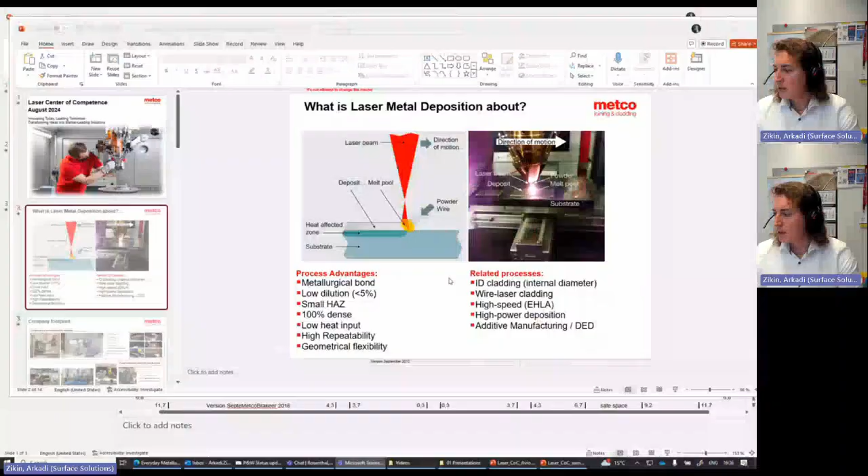So what is happening in laser? If we use laser as an energy source, we focus it with the help of certain optical components, because laser is just a box. You have some fibers which bring the laser beam to a surface. You can define dimensions - typically it's a circular spot, and you can define the diameter of it or the shape of it. That means I know exactly that within a certain shape, which I put with my mirrors, I have an energy input.

You can go further with monitoring and temperature measurement. I can even measure temperature within this spot. Then I can introduce a filler material in terms of powder or wire to this area, and then I build a melting bath which interacts with my substrate material in a very minimum way. So it means we extremely reduce heat affected zones, we have less impact on substrate, and we also minimize distortion by still maintaining a metallurgical bonding.

So the biggest advantage of welding is metallurgical bonding. However, if we compare laser to classical MIG, MAG, and even PTA processes, the core advantage is dilution. I don't know, Peter, if you know what dilution is. Yeah, it's the mix between the substrate and the powder you add. So typically in welding, you have like 50%. It's typically a 50-50 mix.

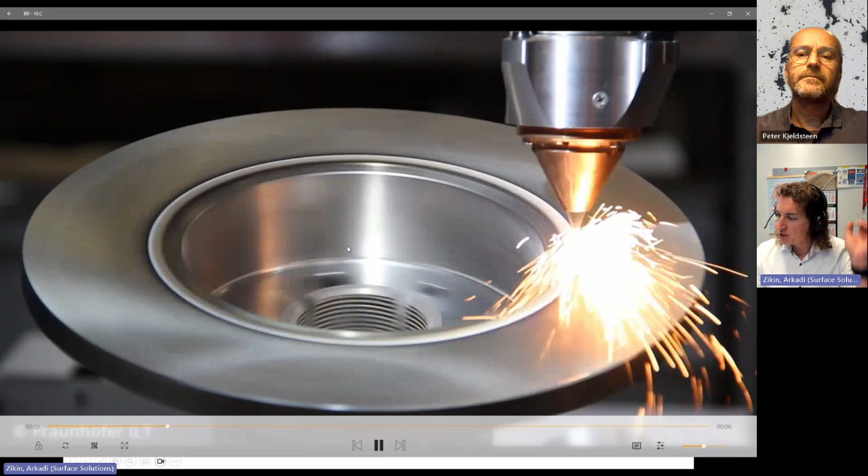I just want to show you a very beautiful video of how you can see the process working. Let me pause here.

Important to show you: this is a nozzle which feeds powder to the surface from one side. What you see here is nothing else than a powder flow to the surface. The laser beam comes in the middle from a nozzle to the surface as well. This orange area here is the laser beam, because it's not visible to eyes in a normal environment, since we work with infrared lasers.

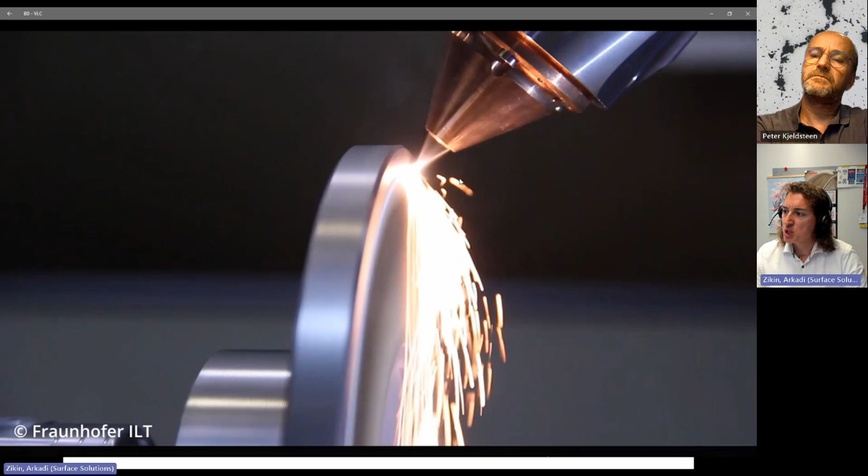So the powder is forced, it's not a free fall. It's injected with a gas, a carrier gas. Typically we use feeders which transport the powder to the surface using argon as a carrier gas.

But in differentiation, I know you have an HVOF background. In HVOF, you accelerate particles to maximum speed toward the surface because you want high kinetic energy. In our case, it's the opposite. We want as little powder kinetic energy as possible, because we don't want the particles to jump away from the melting bath, we want them to stay. This is a second advantage of laser cladding.

If we talk about deposition efficiency, in simple words, how much percentage of the powder I put on the surface remains within my coating, we talk nowadays about 90 to 95%. That's pretty high. In HVOF, if we're above 50%, it's a good day. There are some plasma processes where it's below 30%, and for laser too you can have lower deposition efficiency. It always depends on your task, but for normal applications, this is the case.

It's also very important to see that the heat input is extremely local. If you did this with PTA or any other process, the whole part would already be red. So your heat input is extremely high compared to laser cladding, where it's very local. There's not much powder going to waste.

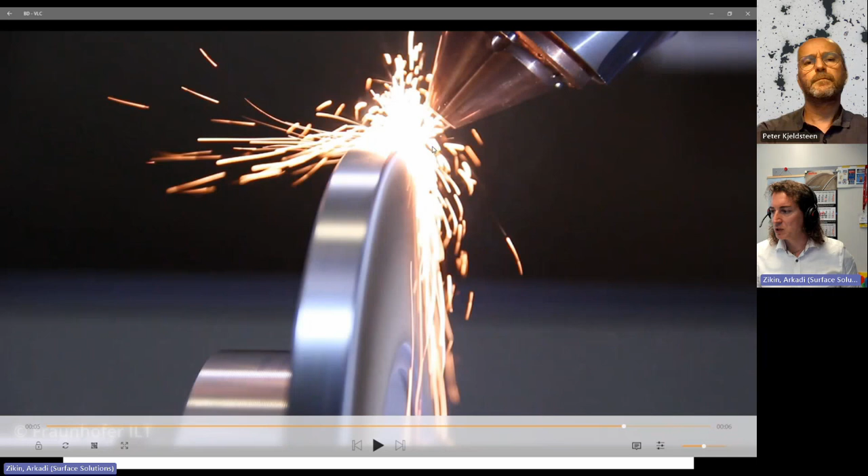So there are a lot of technological advantages which help us talk about it as a king of all deposition hard-facing processes, while still having a background as a welding process.

If we go further, advances in laser development have brought us to understand that the laser beam can be transferred to any type of geometry. So we can work on internal diameters, meaning there are tools which enable us to go inside pipes with a minimum diameter of 25 millimeters. We talk about a €1 coin, where I can go inside and cover the area.

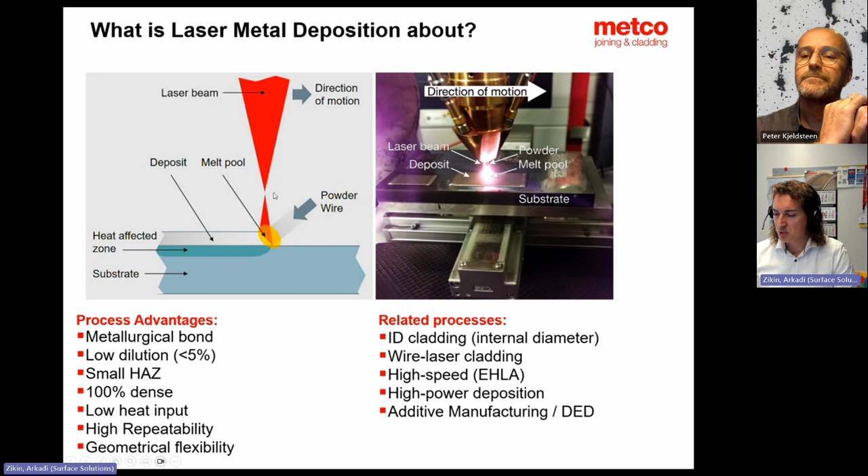We also talk about so-called additive manufacturing, which in laser cladding terms we call LMD, laser metal deposition, or DED, directed energy deposition. It's nothing else than doing multiple layer depositions to build complex structures and shapes. They can be free-form, or have special features on top, and so on.

Let me give you an idea of what we do at my company, Oerlikon, where we work under the brand Metco Joining and Cladding. We use lasers as an energy source for a bunch of different applications. We're not really dependent on one product or product group. If there's a need in oil and gas, power generation, or automotive industry, we even build rocket components using this technology.

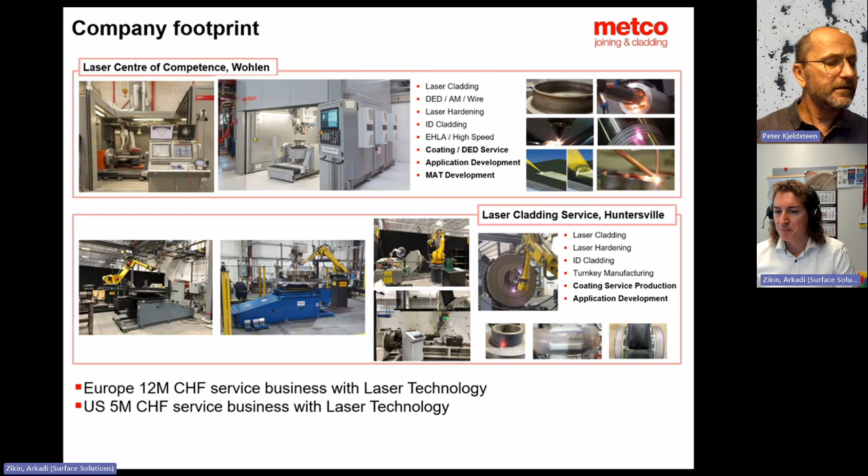I believe the rocket exhaust from the Ariane 5 rocket is made with DED. I can't tell the details on this because this is a property of ESA, Ariane, and other suppliers. But what we can talk honestly about, and this is something I'm personally extremely proud of as a technology-passionate guy...

SpaceX has introduced the third generation of engines, Raptor 3, and they say it has over 80% additive manufactured components. If we talk about over 80% manufactured components with additive manufacturing, you can be sure there are also DED or laser cladding components included. Absolutely, yeah.

We do our work. Unfortunately, I can't share any results, but we've been doing this for 5 years already, not as research, but I'd say together with a customer, process qualification. To my knowledge, we are one of the advanced manufacturing centers exactly for this type of complex question.

Arkadi, you said that you're able to control or measure the temperature on the deposition quite accurately.

I've been working a lot with high temperature processing, and I've learned that one of the most difficult things in the world, even more difficult than to understand your wife, is to measure temperature when radiation is dominating.

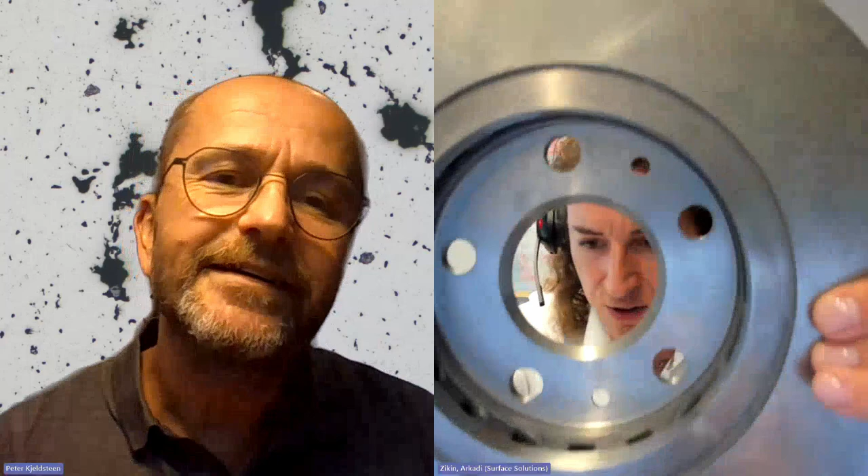So this brake disc—if I look at my brake disc in the car, it wears and it gets smaller and smaller. But the technology you were talking about, you said 15 microns? Let me step out from the camera and come back with an example. So I have one brake disc here with me. It's on my desk always, with a laser cladding coating after post-grinding, post-machining.

What is the motivation to put an additional process on a brake disc? It's all driven by the new Euro 7 norm, which declares that fine dust emissions should be reduced. It's not a commonly known fact that 30% or above 30% of fine dust coming from a vehicle is coming from the combination of brake disc and brake pad.

Probably, Peter, you also noticed two things which happen to a disc. First of all, if you drive a lot, especially on the highway, and you have to brake a lot, suddenly you realize that your colored discs are all black—because the dust just covers it. When I was young, I was always thinking, damn, are those streets so dirty that my disc gets so dark colored? No, it's because of the wear of cast iron on the surface of your disc and the wear of the pad. This all causes fine dust particles which harm our health.

And you know what? I would never live close to a railway station, because if a train is braking, can you imagine how much fine dust is coming out from there? People don't talk about this much. That's even worse, because the disc is like 500 to 600 millimeters in diameter. Of course they have different braking systems, but classical trains also do use brake disc and brake pad combinations.

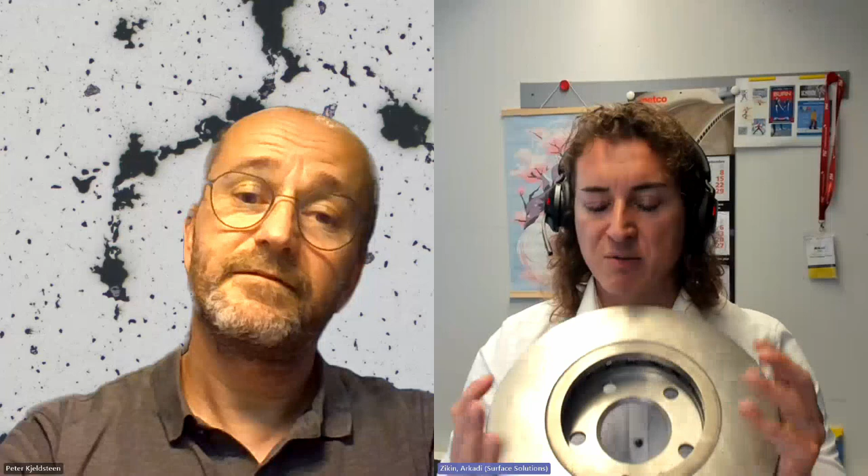So thermospray technology had a couple of great solutions. However, when they realized how expensive it would be per disc, they said there must be something cheaper. That's how laser cladding came into the game, where the people who work in the laser world found a solution that says with high-speed cladding, we can cover the surface within 20 seconds. That means our processing costs are not so high. We can deposit with 95% material deposition rate, so our material consumption rate is also pretty high, and the post-machining demand is only 50 microns.

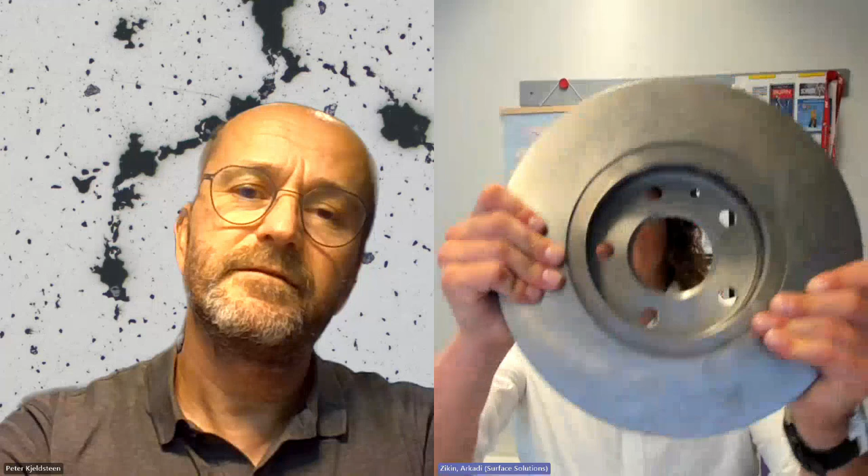So within a full minute, just to give you a feeling without going into technical details, you get a full brake disc ready. Basically automotive companies pay only for a minute of processing. Of course there are investments and so on, the processes are running, but you need to fulfill the Euro 7 norm.

Does it improve your wear resistance? Definitely does. Do we use carbide coatings like we used for Porsche? No, we don't. However, the materials which are qualified there have all survived salt spray tests over 1,000 hours. That means we're talking about something highly corrosion protective. So this dust, or rather corrosion, especially for e-vehicles, is not an issue.

And I'm quite excited about when this will really be in serial production, because I would definitely change my car's brake disc to one of the deposited discs using Oerlikon materials and Oerlikon technologies. This is what, when we come back to passion, makes us extremely proud that we are part of something which is changing the world in a better direction. Can you disclose what metal you put on top of it?

Currently, there are several combinations. We have developed our own materials, so we invest a lot of energy and time to develop materials for technologies, for applications, having special properties exactly to be used in this so-called high-speed cladding process, and at the same time still meet quite harsh requirements in terms of price.

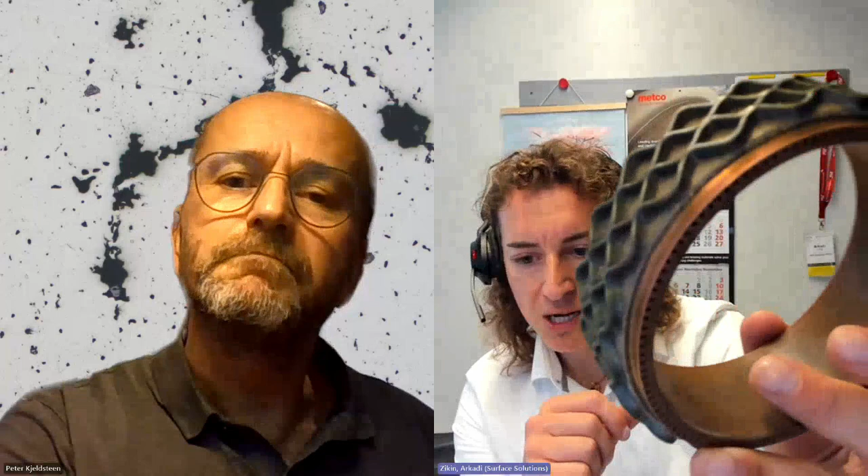So can we build internal holes? To a certain extent, because in this case it would mean we need to work overhang. Under a certain degree or angle, we can do this, to produce repeatable structures like honeycombs. This is a special case of an additive manufactured copper part without distortion, we can also do this.

So there's a lot of knowledge behind how I design my process, and by process I also mean fixturing. Because if you need to build 3D parts or complex shapes, it's not only about starting a laser, putting filler material, and building something. It's also about understanding the whole process chain, how I control the process, what about the fixturing, how I set my strategy, which surfaces I do first, how I cool down the component if required.

This is what probably I'm quite proud of, in that the team which I have the privilege to lead or supervise has gained a fundamental understanding of how those various technologies within the laser cladding portfolio we have impact your process, and how understanding them, fixturing and so on, diversifies your offering to a customer.

You said previously you had this aha experience with the accident with the wrong mix, where you had a cermet, a mix of ceramic and metal. So are you able to deposit every kind of material? Could you deposit pure ceramic, or are you limited there?

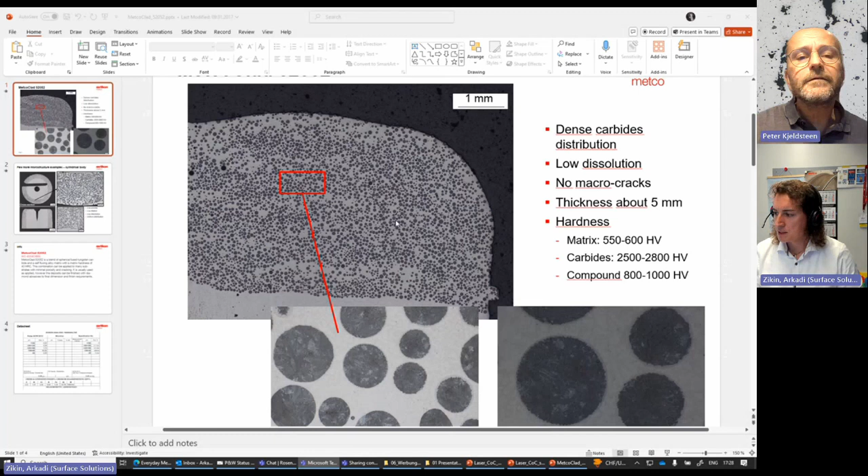Now you see here a classical material, we changed the name, Metcoclad. This is multiple layer deposition of tungsten carbide spherical particles in a nickel self-fluxing base matrix. If you look closer - and this is the most important image - this is so-called fused tungsten carbide. It consists of two phases, white and dark, which have different amounts of carbon inside. It's called double tungsten carbide - I don't know how it is in English, but fused tungsten carbide is the proper name.

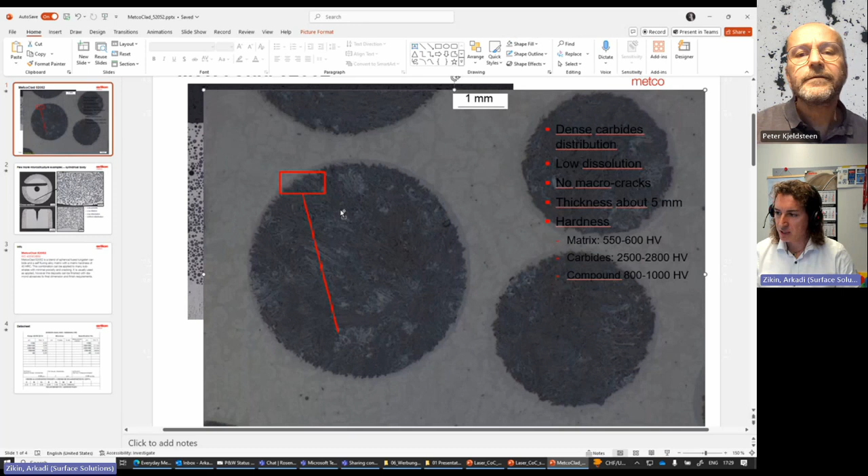What happens typically within: you have a dendritic nickel self-fluxing matrix, you can see it here. In any conventional process, typically you melt those carbides down so much that they actually recrystallize and build eta phases inside the microstructure. Here you see a very beautiful, maintained rounded-shape particle which was an initial particle, and there is almost no diffusion zone of the tungsten carbide, which helps keep the carbide hardness. I'll put it in white color now so you can see it - almost up to 3000 Vickers, an impressive number. And if we look deeper, they are extremely well and uniformly distributed within your coating profile, and this is only 60 weight percent, which corresponds to 40 volume percent of tungsten carbide within the metallic matrix.

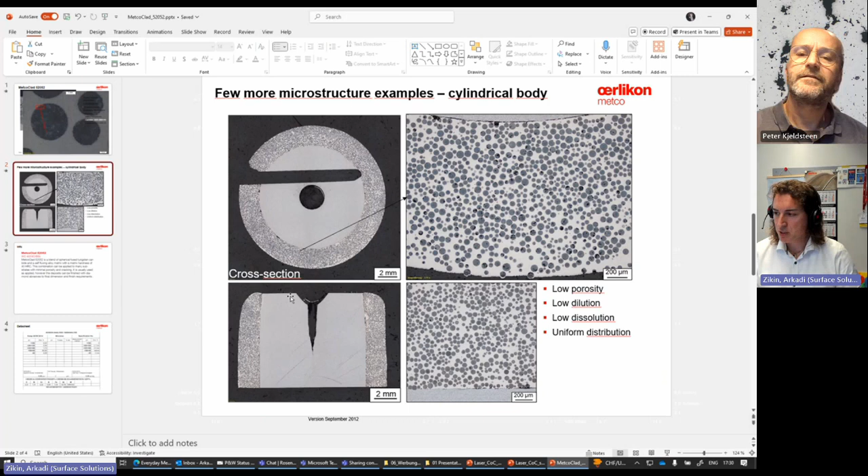It is not possible to see on the microstructure that it is deposited. It has a typical casting microstructure. I can probably give you an example more on a stellite, let's say - I don't know why my PowerPoint is not working properly today, but here.

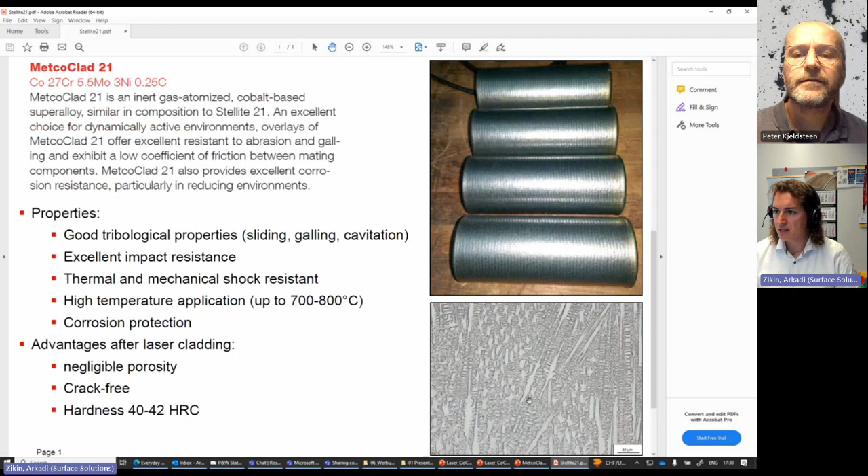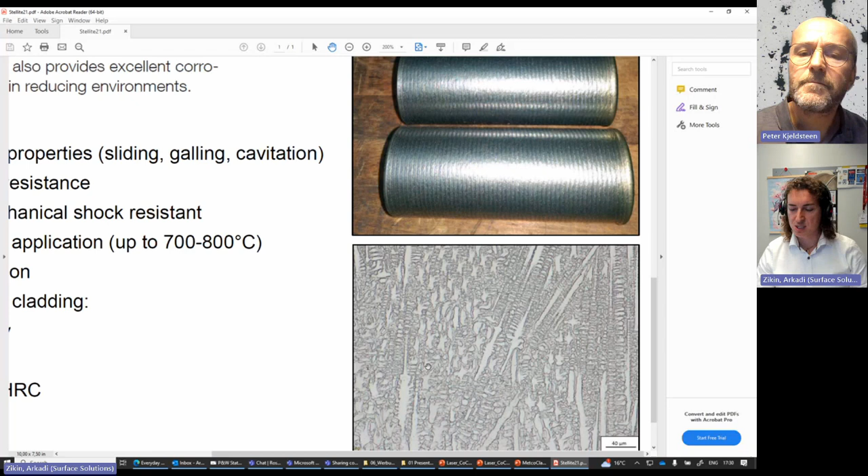If you look at stellite, like 21, it has a typical hypoeutectic structure, dendrites everywhere, so you get it in a similar way to casting. The difference with laser cladding is that due to low heat input and extremely rapid cooling, your microstructure is 10 to 100 times finer compared to casting. Here you see 40 microns, and the dendrites are pretty small, which gives many dendritic alloys like stellites higher hardness values directly after deposition, so you get better properties overall. The Hall-Petch effect shows that finer particles or finer grains give you higher hardness. And you also get better corrosion resistance because you have much more grain boundaries.

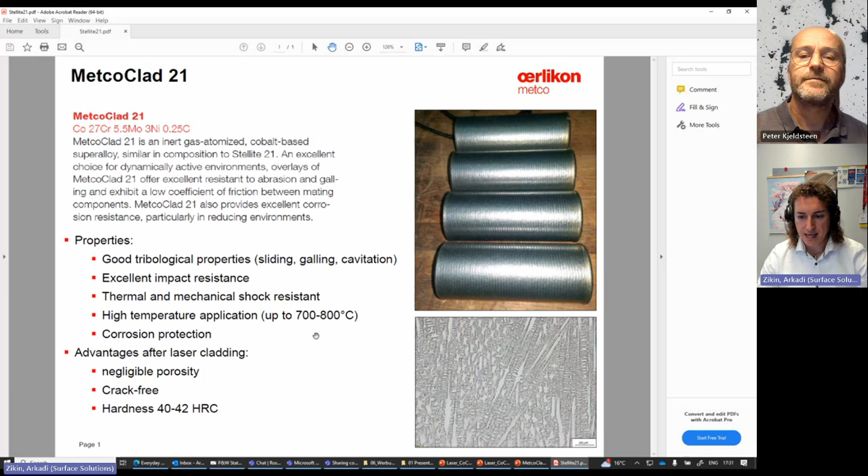So this is a differentiation factor what we see. And knowing that, it's also important to adapt your process because the best example is Stellite 6. I love this example because people come to me and ask, oh, Stellite 6 is one of the most used materials, it's well known.

Do you sometimes need to heat treat the structure afterwards? Depending on material and requirements. What always might happen, especially working with harder materials, is that you introduce stresses.

And in processes like oil and gas, if you use this tungsten carbide reinforced material I showed before, because this is a flagship material used in oil and gas, they insist, depending on the final application, but some steering pads, some drill bit surfaces, some stabilizers, they insist on having annealing to ensure we get rid of stresses inside.